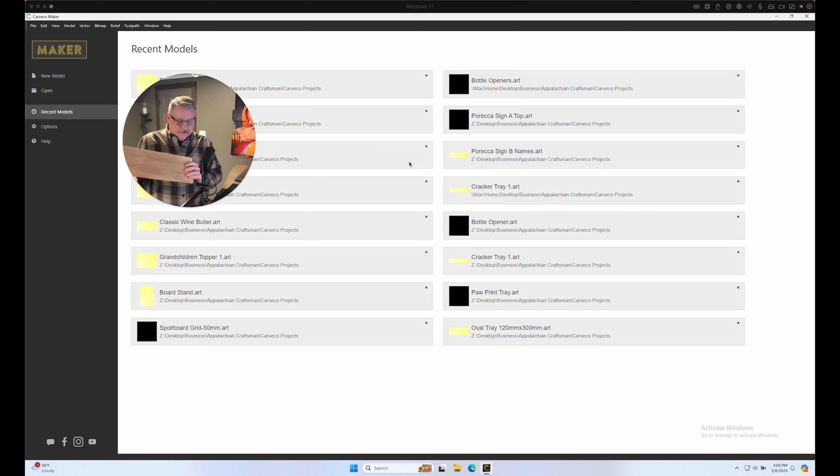Okay guys, so let's get started here. I have a scrap piece of beech wood left from a project from a long time ago, and I'm going to give this a quick measure. When I'm working with smaller projects like this and projects I originate, I typically tend to work in metric, in millimeters. It's just way easier than messing with decimal points and odd fractions and that kind of thing.

If you're not used to that, I know it can be a little bit of a challenge, but something I recommend is this Fastcap rule here.

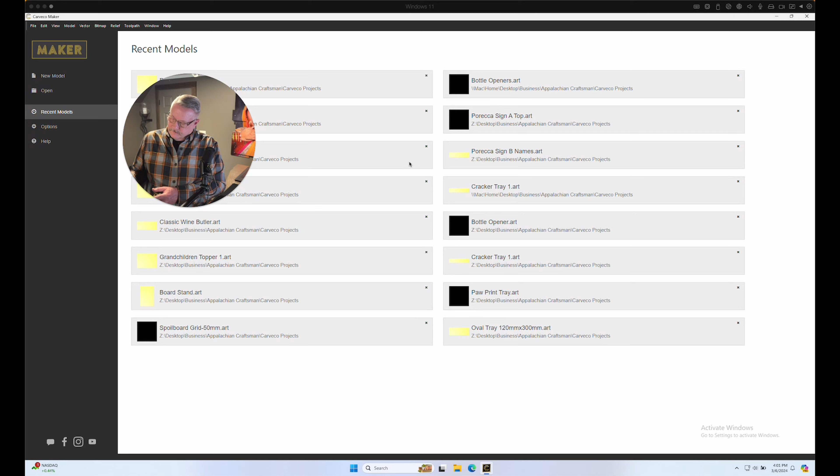It has both metric and imperial on it, and I've found it a great help for transitioning. So I'm going to give this a quick measure, and lengthwise, I am at, let's see, 550. I'm going to call this 550 millimeters, and widthwise, I'm going to call that 150. So 150 by 550.

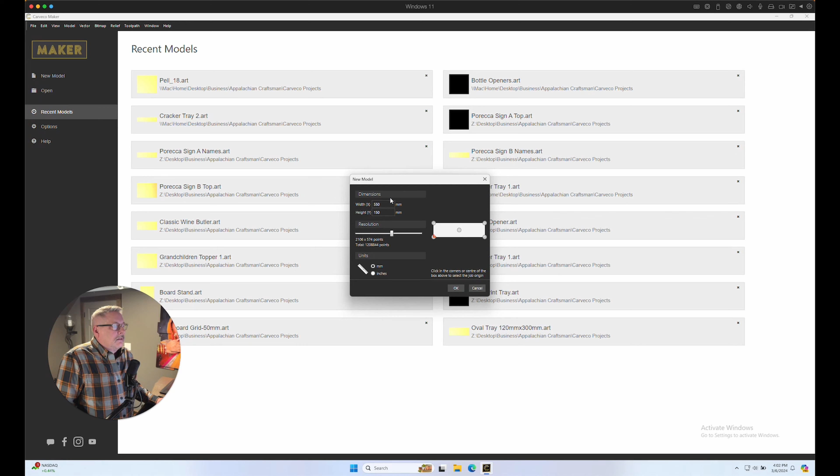So now we know the piece of wood that we're going to use, what the size is. In Carveco Maker here, we're just going to start out with new model, and I'm going to enter in there 550 millimeters by 150 millimeters. If you want to work with inches, you can certainly feel free to do that. Just hit this little button down here, and you can work alternatively in inches.

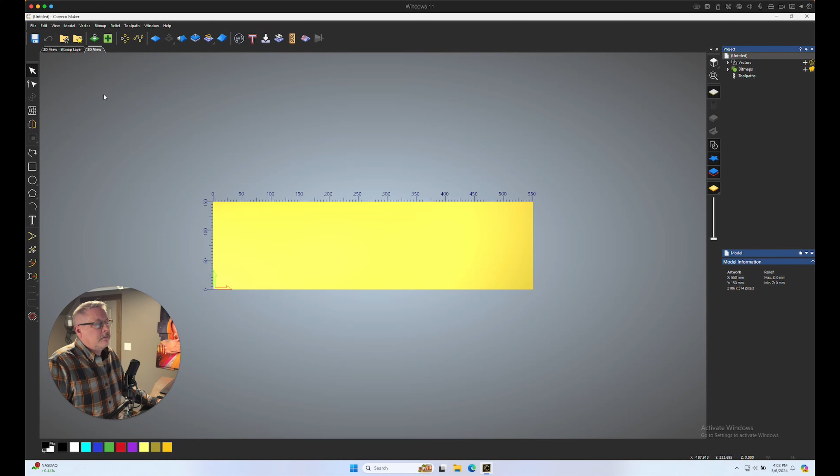Resolution is fine. This is nothing that greatly detailed, so wherever it is at default is fine. For the origin, we're going to use our lower left-hand corner so that when we probe XYZ, this will be all automated on our machine. So with that set, I'm going to hit OK. Carveco Maker is going to set up our workspace so that it is basically the same size as our piece of wood that I'm using here.

Okay, so from here, what we want to do is bring in our vector files. So I'm going to go right up to the top here and click on Vector, Import, and right on my desktop here, I've got an SVG file called Opener. I'm going to open that.

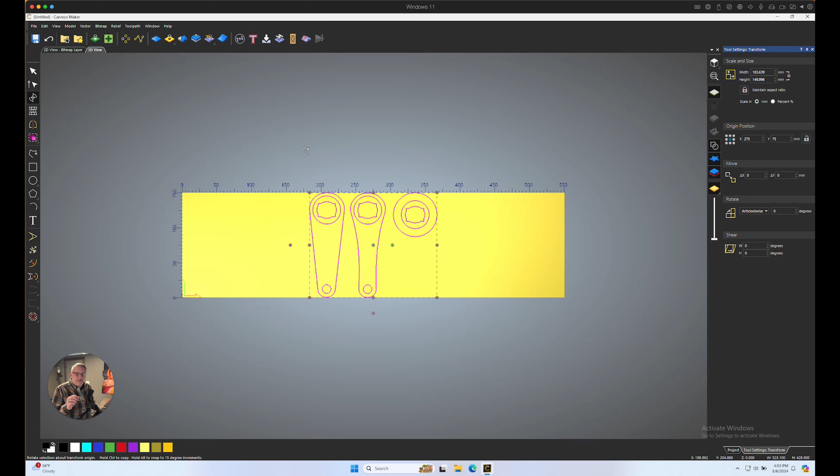Now, SVG files do not necessarily come in to size, okay? But they are scalable. So what we want to do, because in this case, we do have a metal insert that we're going to be putting into them, and the circle that's in this file definitely needs to be the correct size so that these fit. So I'm going to show you a little trick here how to make sure that these are indeed the correct size and will fit the insert.

So if I measure my insert here, I am at 39.63, okay? So that's about 40 millimeters. So what I'm going to do, I'd like to have just a little bit of room. So I'm going to want the space for this to be 41 millimeters.

So I'm going to come over here and I'm going to grab my circle tool and start to draw a small circle out. Now over here on the right of Carveco Maker, we will see automatically come up the tool regarding the circle. So what we want to do is set our diameter to be 41 millimeters, and we'll click Create. That gives us a circle on our workspace that we know is 41 millimeters, which is the exact size that I want this insert to be, the exact diameter.

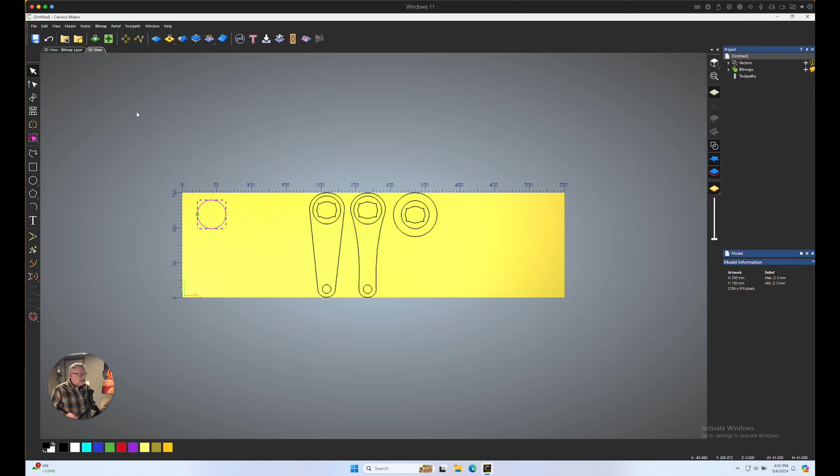Now I'm going to click and drag on our vector files that we brought in, and start sliding those over. In this particular case, it looks like we are really close, but that doesn't always happen with SVG files, so you will want to check this. You can see the purple lines here, this circle, over top of that black line, and boy, it is very close, but that doesn't mean it's exact.

I'm going to click off of that. We're so close, I don't think we need to worry about resizing the whole drawing. But you certainly can—just hit Shift, and then you can click and drag a corner. Let me show you here.

If I select all of these, I'm going to come over here—third one down is our transform. When you click on your transform button, you'll see the box show up. And if I hold Shift, I can resize these and move them around. Okay, so I'm going to undo that.

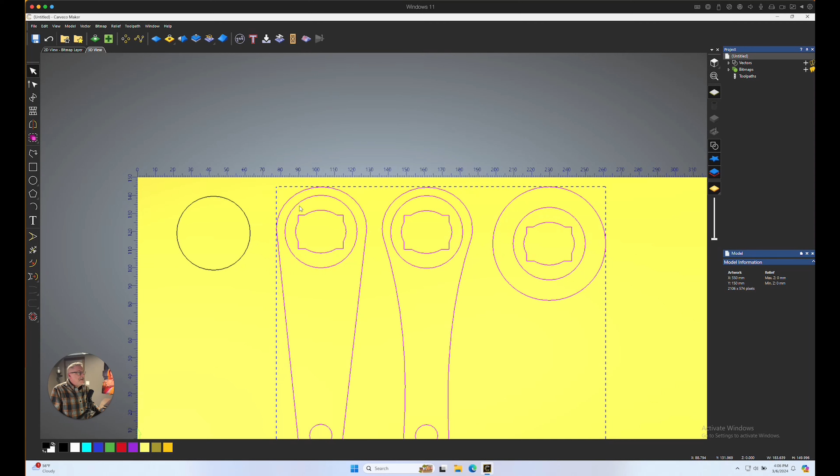If we do not hold Shift, which is actually what I want to do—I get confused, so I'm sorry, because I work on Mac and in Illustrator a lot, and certain things you have to hold Shift for, certain things you don't. But in this case, we do not want to hold Shift. We just want to click our transform, grab a corner, and we can scale this up or down and move it around.

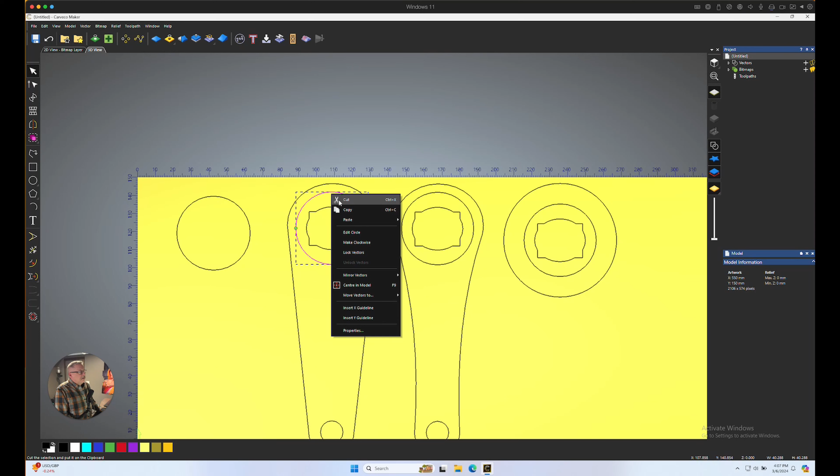Having said all that, these circles are close enough that if I need to make a minor adjustment, it's certainly not going to affect the drawing. So I'm going to select this circle, and if I right click, I can choose Edit Circle.

Now when I do that, that brings up our circle tool again over here on the right side. We can see in my particular case right now it's at 40.288. Well, I certainly want that to be 41, so I'm just going to override that to 41, and create.

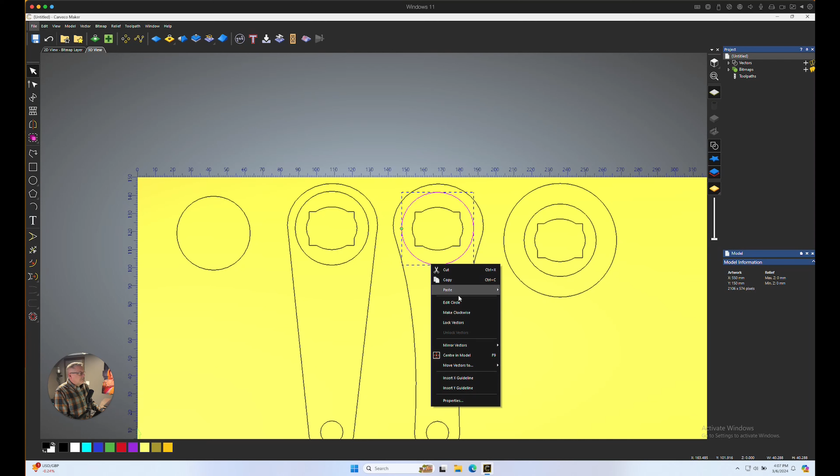I'm going to do the same for these other ones. Click the next one, right click, edit circle, make that 41 millimeters. Lastly, this round design here—click that circle, right click, edit circle, and make that 41 millimeters as well. All right, so there we go.

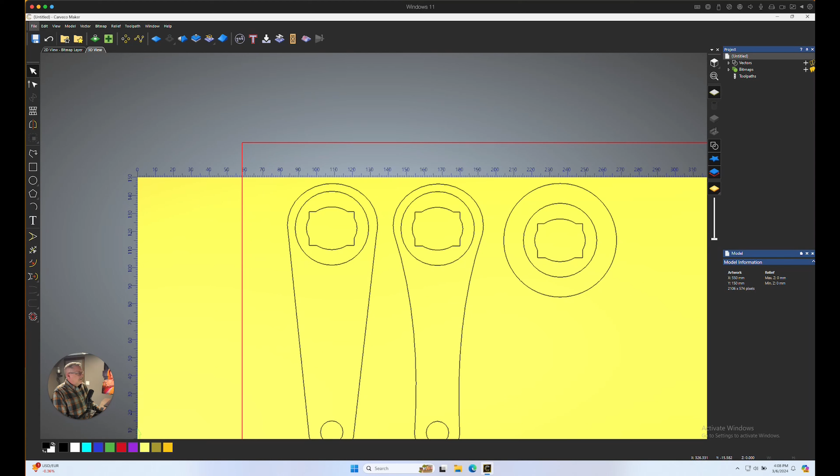Now I can get rid of this circle, and that takes us to just having these three vectors ready to go. So what we can do now is position these so that everything fits on our scrap piece of wood, and we can batch these out and get as many out of this piece of wood as we can.

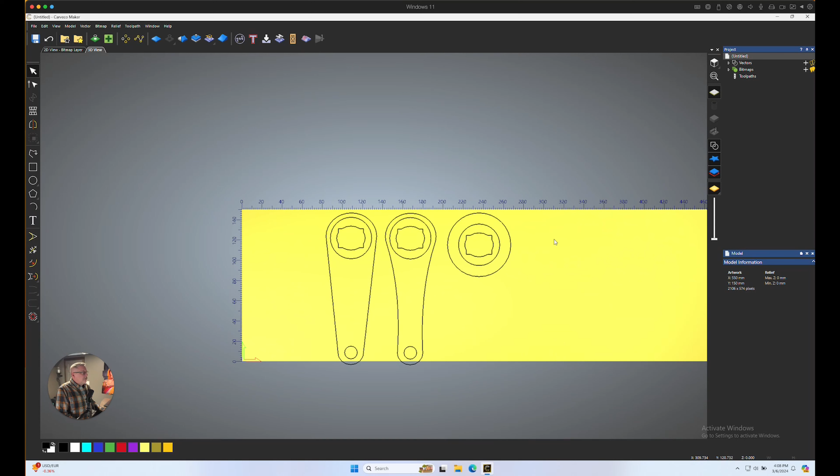If you ever need to recenter your workspace, you can just come over here to the right side, and the second button down will allow you to recenter that. And then I'm going to zoom in just a little bit here again.

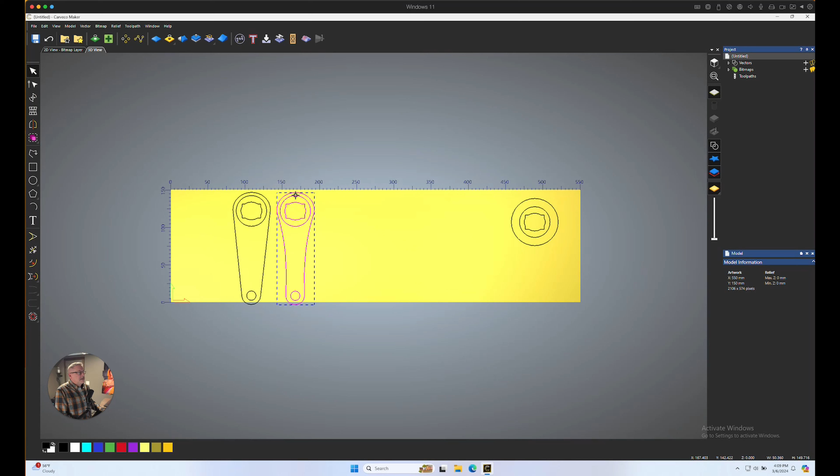So what I'm going to do is grab this first circular one and just move it out of my way. Then I'm going to grab the second one, click and drag, and move it out of my way as well. And then finally, I'm going to take this first one here and once again click the transform button so that I can rotate this.

Now we know it's the right size—all three of these are the right size, so we don't have to mess with the size any. But what we want to do is come over here to the right side, and there is an area called rotate, and you can choose counterclockwise, or Carveco Maker calls it anti-clockwise. In this case, we're just going to choose clockwise and 90 degrees.

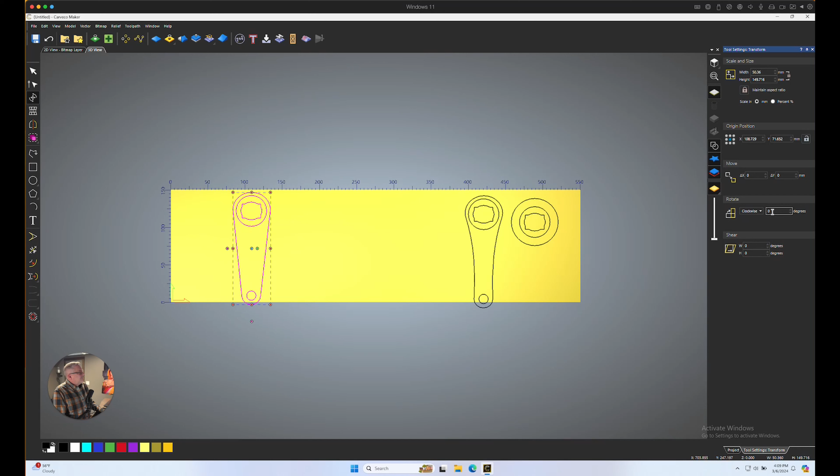And that will turn that right on its side. Then I can position that where I want it. In this case, I'm going to keep that highlighted.

I am going to copy that, which you can use Control C if you like. And then I'm going to come back up to Edit and paste that, which would be Control V if you like, and move that down here. Okay, so I've got those two ready to go.

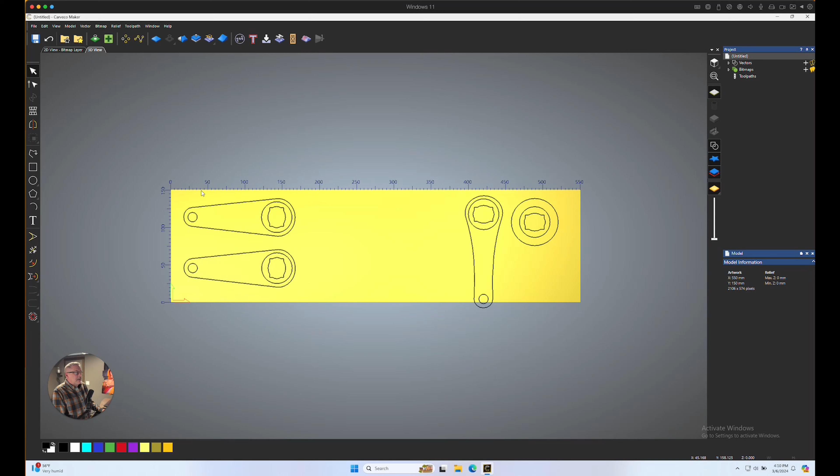Now we're going to do the same thing to this second one. I'm going to click and drag, highlight that one, and then come again to my transform tool, third button down on the left. We are going to turn that clockwise 90 degrees. Apply. I'll move that over.

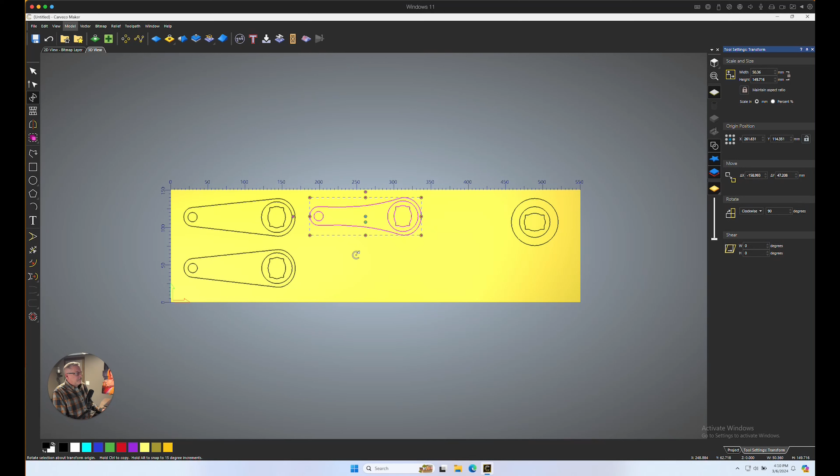Control C, Command C if you're on a Mac, copies. Command V or Control V pastes, and there's our second one. So now we've got 4 out of here.

Let's go ahead and do a couple of these round ones as well. Again, we're going to copy that and paste it. There we go, so let's move that over. Click and drag, grab this one, and we will move it over. And I'll tell you what, I think we got room for one more here.

You want to make sure that you're giving yourself enough room between these, because remember, we're going to be using a 1/4 inch end mill to cut these out. So we're going to want to have a little room. There's no sense bunching things up too much. Now I could squeeze some more out of this board if I really wanted to by rotating these and turning them around and positioning differently, but this is fine for demonstration purposes.

And I'm already going to get 1, 2, 3, 4, 5, 6, and I'm going to go ahead and copy this one. And again, paste. And so we're getting plenty out of this little piece of scrap beech that I've got here. So there's 7 of them out of there.

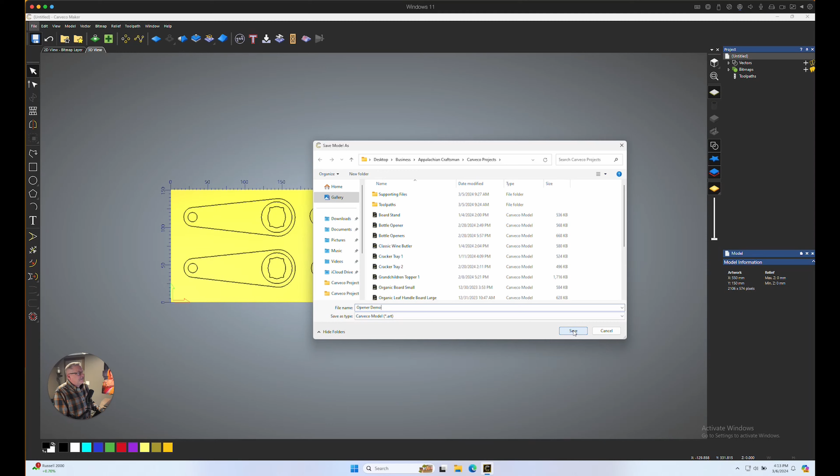All right, so now we've got our pieces positioned, and now I've been working in the 3D view just kind of by default, but you can be working in the 2D view for this as well. It really doesn't matter. It's just a matter of when you actually get ready to view your 3D view that you want to make sure that you're in your 3D view section here when you do your simulation. So I tend to kind of just work in 3D view, but it certainly doesn't matter.

All right, so we've got all our pieces, so now let's start thinking about our order of operation. So I think the last thing that I would like to do is to cut these out. Now I'm going to put these on the CNC with the CA glue and blue tape method. So these are all going to be held down really good. I'm not going to need to put bridges in or anything like that. So that'll be my last operation, is cutting these out.

And I think what I'm going to do is these small holes here on these 4 that I'm using for basically a hanger, or you could tie a piece of leather to it, or rope or whatever you have, some type of a string, whatever you want to do there. But I think what I'm going to do, since those are so small, is I'm just going to pocket those out. If I cut those, you could end up with that little piece floating around that could jump out and break a bit or something. It's just not worth it. And it literally only takes maybe a half a second. So I'm just going to pocket those out.

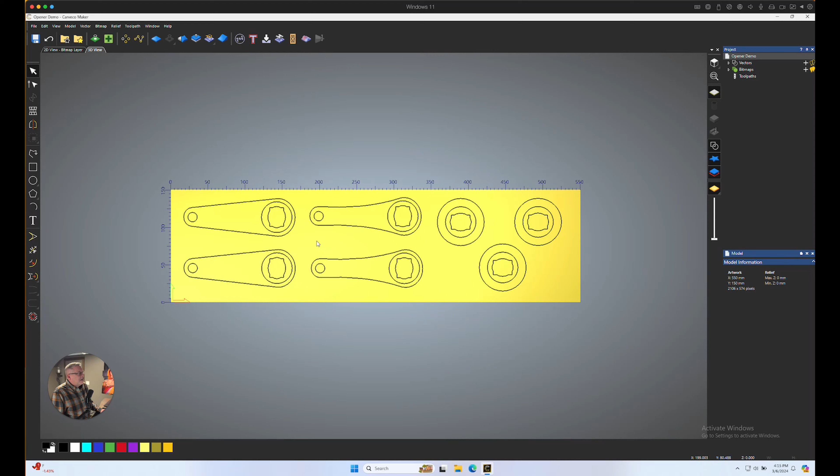So I think what we'll do first here is let's get our inner circle set here. So I'm going to select all of our inner circles. I'm just going to click on that first one.

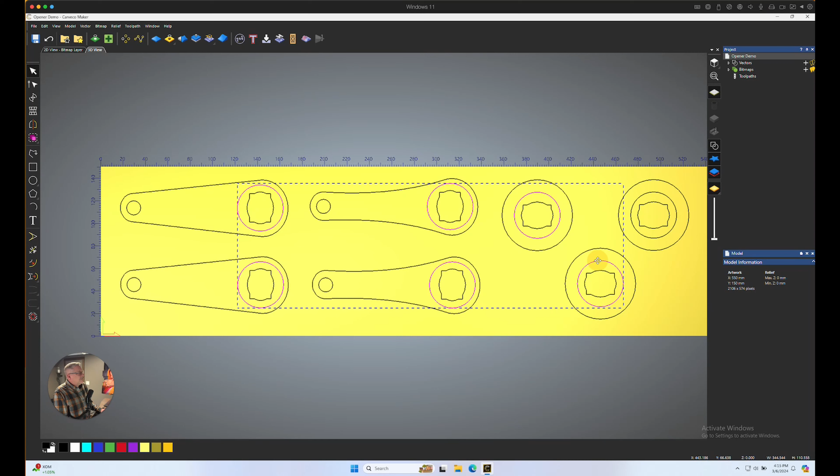I'll hold down Shift, select the second one, third, fourth, and then grab these three over here. Now we're going to start working on our toolpath.

I'm going to go to Toolpath, come down to Area Clearance, and make a little pocket here. These are just a shave under 1.75 millimeters thick, so to fit nice, I think I'll make that hole 2 millimeters. Our start depth is going to be 0, the surface, and our finish depth in this case is going to be 2 millimeters. You see what I mean by working with these smaller projects where millimeters just kind of comes in handy versus trying to work in Imperial—it just makes life a little easier.

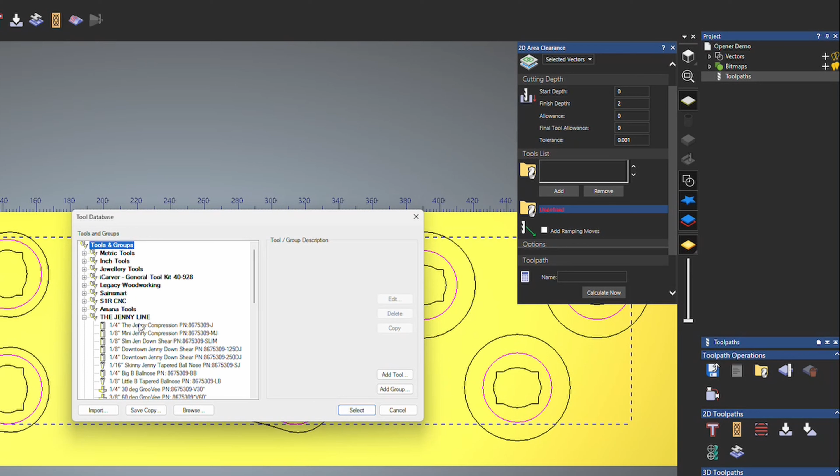Now what I'm going to do is add a tool here. In this case I'm going to use my quarter inch Jenny compression bit—nice quarter inch compression bit. Take that out, and all of our defaults as far as speed and feed here are just fine. That tool data file is downloadable from Cadence Manufacturing if you've got the Jenny bits, so you'll want to do that. All of our default feeds and speeds in here are fine.

Now the one thing I am going to change here is instead of a raster cutout, we're going to do an offset cutout. That way our bit goes in a circle to take that out, and since we're making a circle, that'll work out very nicely. This is so shallow that we really don't need to worry about any ramping moves, at least with the machine that I have, the Onefinity Foreman Pro. We're only going to be taking out a very shallow little pocket.

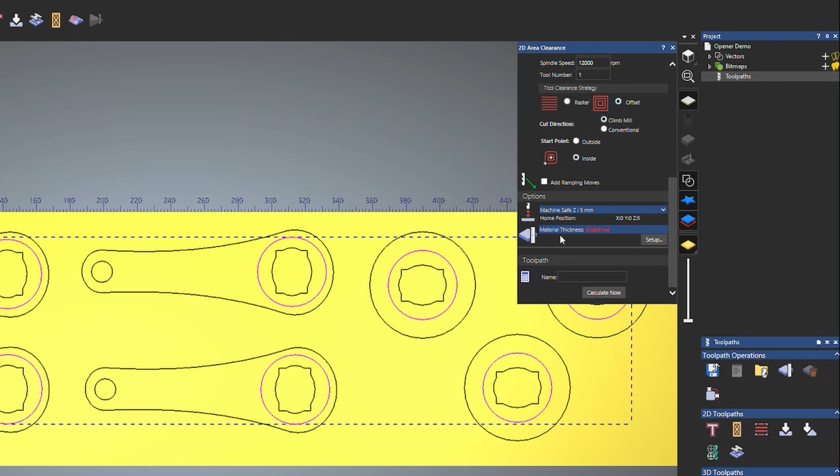And then lastly, the one thing we have left to do is set up our material thickness. So I'm going to hit Setup, and using my calipers here, I'm going to check my material thickness, and that is 21.2—so I'm just going to call that 22 millimeters thick.

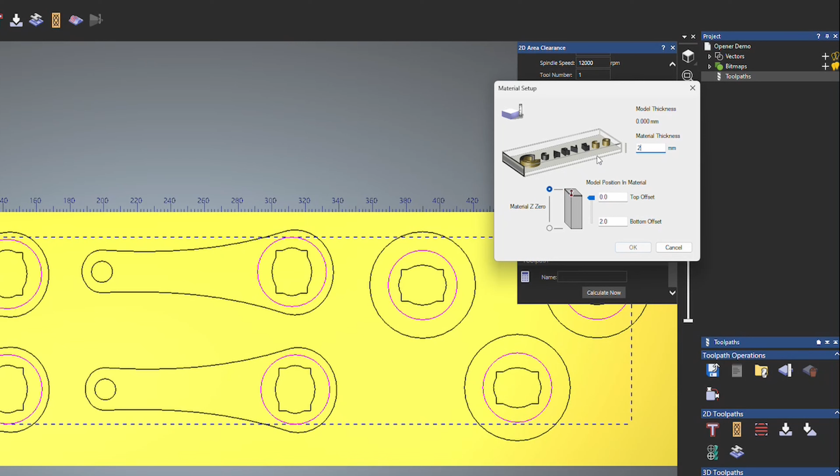There we go, and so now all of our toolpath is ready. All we have to do is name this—I'm going to call this Insert Pocket—and we'll hit Calculate. All right, and there you go. You can see that the bit is going to come in from the lower left side and make some concentric circles here, and we are going to cut that shallow 2mm pocket. That's going to be the first thing that happens here.

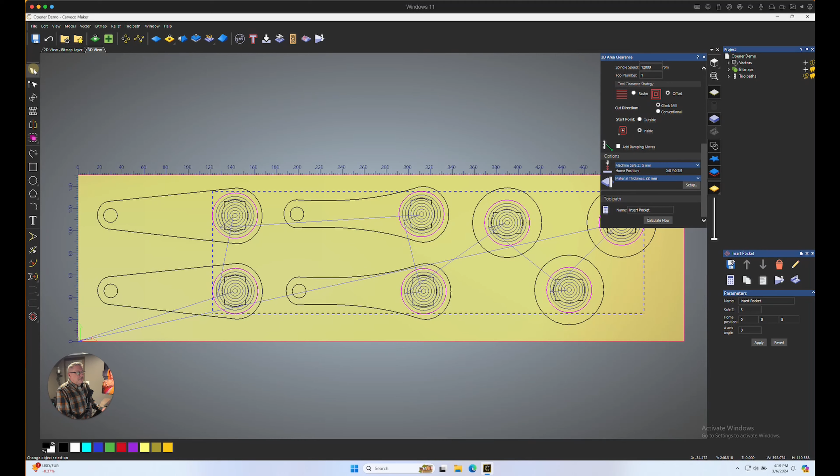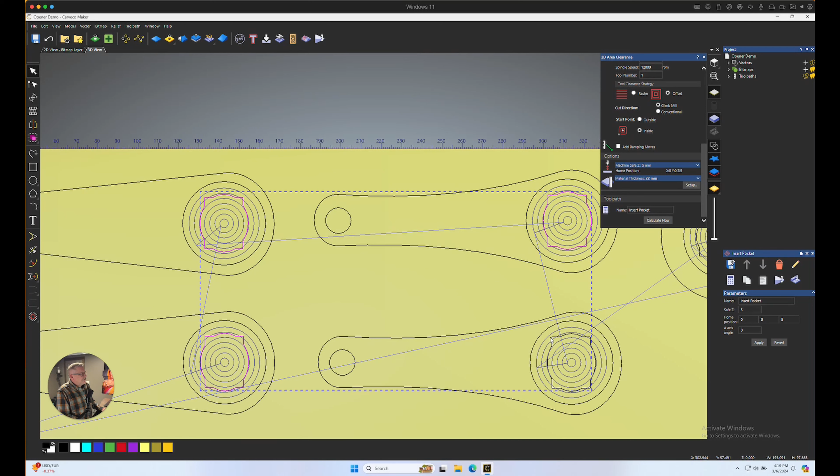So now what we're going to do is zoom in a little bit on these to make things a little easier to see and to grab. I'm going to click off of that, and now select these funky kind of shapes here—select all of those, holding Shift and clicking. I'll zoom out and then zoom back in over here, and again hold Shift and click that one, and that one, and that one. Okay, so now I've got all 7 of those pockets selected.

So now we've already got our pocket tool area here still up, and nothing is going to change—we are just going to change only the depth that we're going. We selected these other insert pockets, and that's just going to be a deeper recessed area that will allow the cap to go into when you have your bottle opener. And we're going to use the same bit—beauty of this project, super simple, one bit, no bit changes.

So what we're going to do is, right at the top here, cutting depth—now remember, if the first thing we do is cut out that shallow pocket, that pocket is 2mm under the surface. So our start depth will be 2mm, and I think if we allow 10mm for that area, that's plenty for a cap to fit in there easily. 10 plus 2 is 12, so we're going to make our finish depth 12mm, and everything else defaults, our same bit is in there.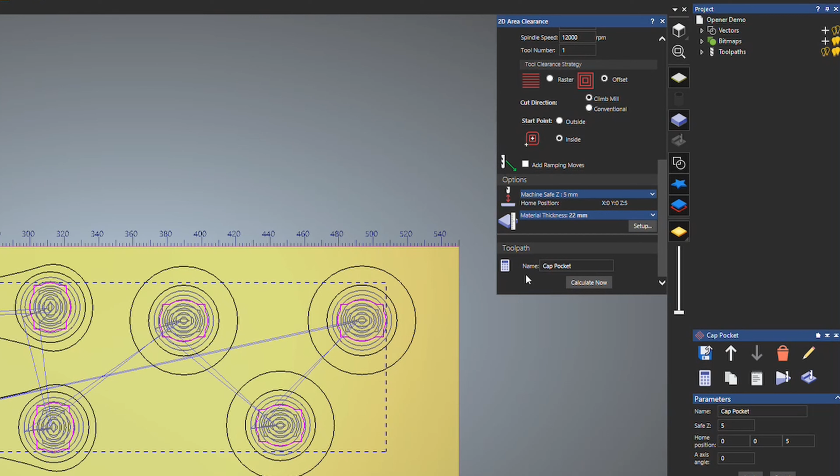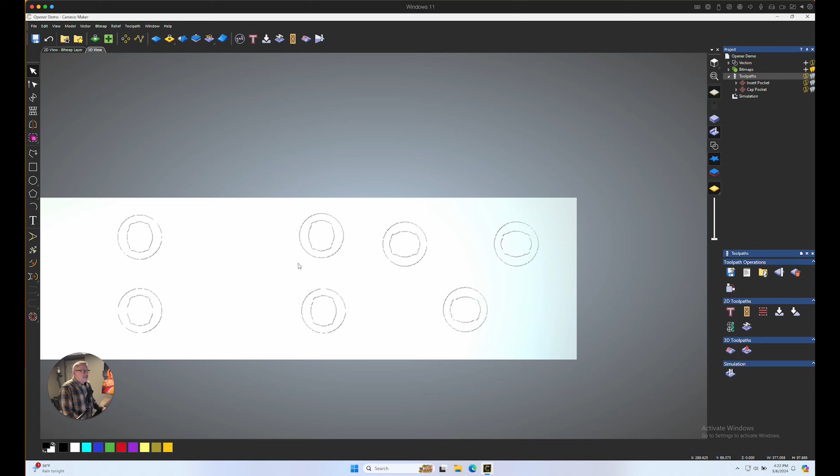And again, there is our toolpath for that. Now I'm going to go ahead and close this. And if I go into our toolpath button over here on the right side, you can see I've got insert pocket and cap pocket. So before I go any further, let me go ahead and simulate that, and so you can see what that looks like.

So there we go. If I zoom in, you can see we've got our outer circle 2mm deep that'll hold our metal insert, and then our interior pocket or cap pocket is going to start at 2mm and then go to a total depth of 12mm.

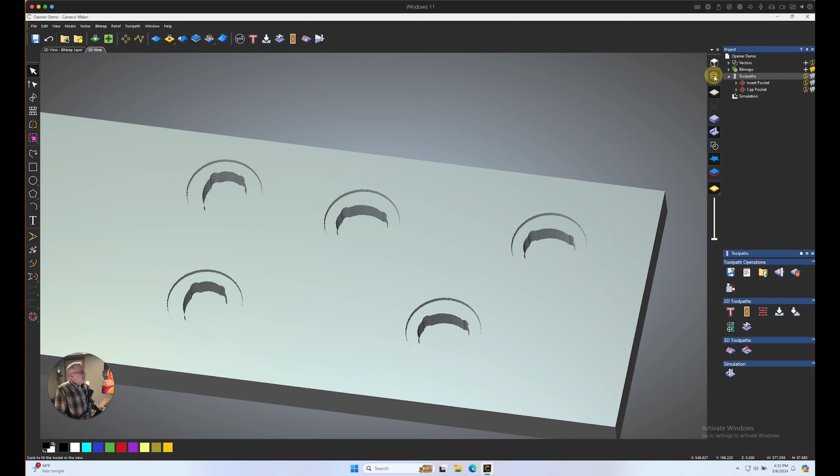And then once again, I'm going to hit the button here to center our project, and I can come back in, zoom in. Now I'm going to go ahead and delete this simulation so it's not in the way for us.

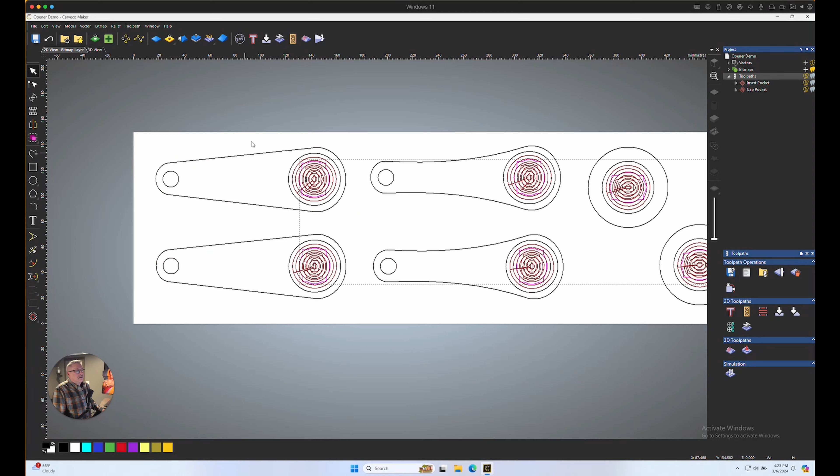Let's see, I'm going to come back into 2D view where we can still see everything here. Now what we'll do is we will take care of these small holes here. We're going to pocket those out.

So those should be easy enough to, sorry, I don't mean to jump that around on you, but it scrolls really fast here. So I'm going to select the first vector hole here, hold down Shift, second one, this one, and this one. The round ones don't have that.

And so now we're going to pocket that out. So I'm going to come back over here to our area clearance tool, and our start depth will be 0. That is the surface. Our finish depth, what did we say that was?

22mm deep. Our tool, again, I'm using the same bit, my 1/4" Jenny compression bit. Select that. Everything else stays the same.

And we are going to choose offset again, round hole. We want to do offset so that that bit goes in a nice concentric circle there. And again, we really don't need ramping moves for something this small, very easy.

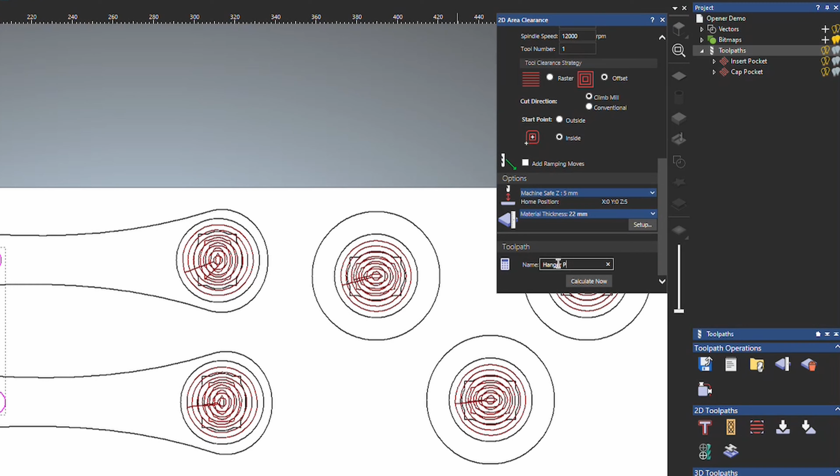And so now we will name that hanger pocket, and I will calculate that. You can see that bit's going to come right in, go around and take that out. So that takes care of that.

So we are almost there, kids. All right, so now what we have to do is just cut our actual pieces out. We've got all the insides cut the way we want them. Now we're just going to do our profile cut on the outside.

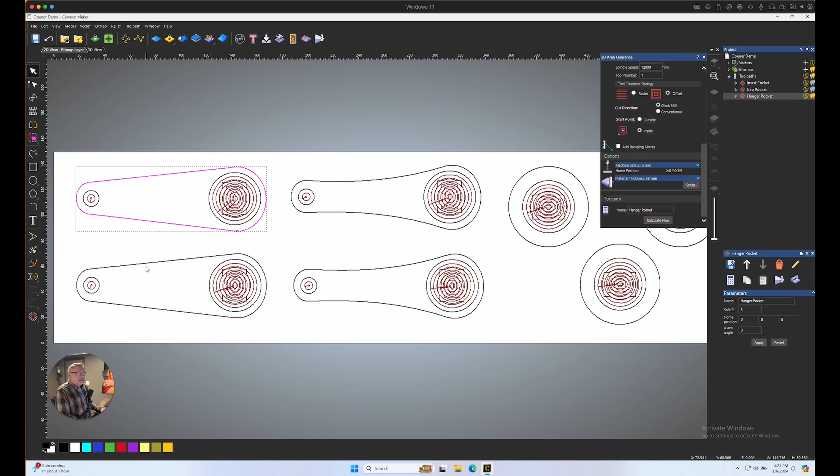So I'm going to select the first one here, hold down shift, second one, third, fourth, and then we'll get the outer pieces of these over here. Get that out of my way. And now that we have all of our exterior lines collected and selected, you can see they're purple there.

What we are going to do is come to Tool Paths, and we are going to select Create Profile Toolpath down here under 2D Toolpaths. We want these to cut out, so we want our bit to ride on the outside of these selected vectors. Our start depth will be 0. Our finish depth will be 22, so we go all the way through.

Again, same bit, 1/4 inch Jenny compression, what I'm using. You can use any bit that you like. My suggestion would be something, though, that is a down cut, but a compression bit, if you have it, is great.

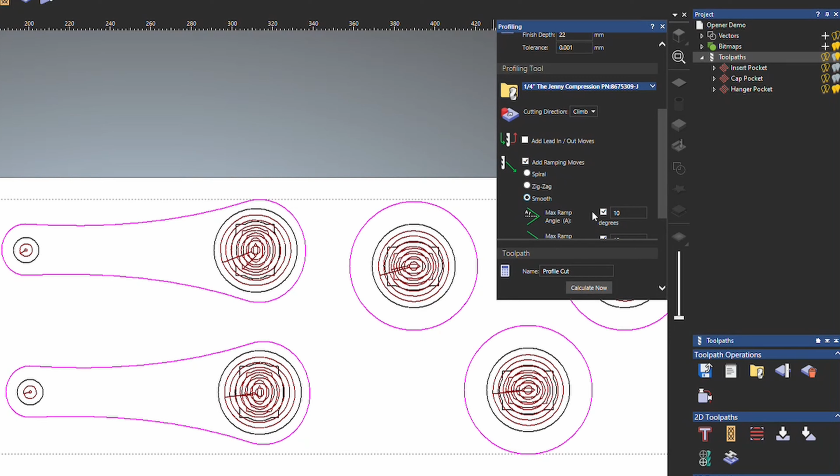Now for this one, it might not be bad to add a ramping in some of these longer ones here. So I'm just going to do a smooth ramp. Defaults are fine, and I will hit calculate. And you can see that outer ring appear around our vectors.

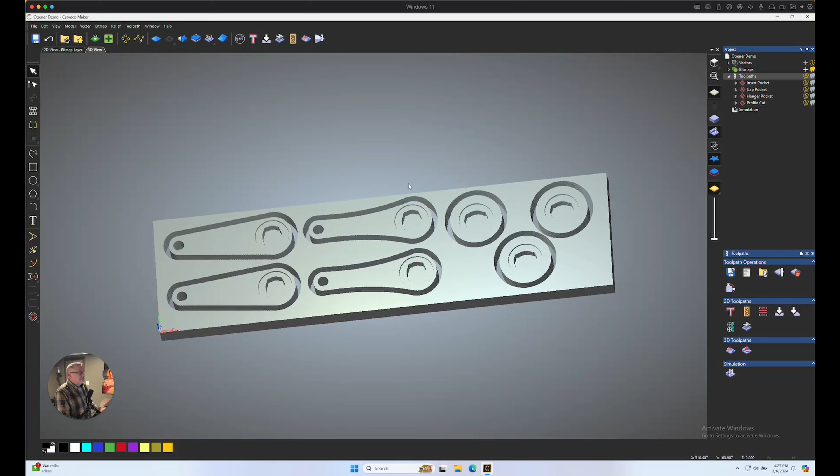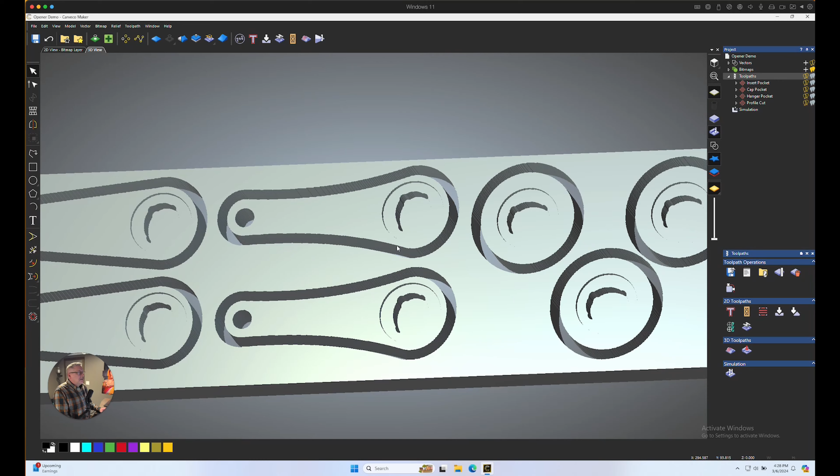And we are set. So if I come to Toolpaths now, and I go ahead and simulate this, there you go. You can see we're all the way through, and we've got all of our pieces made. We've got our pocket for our insert, a little bit of an extra pocket here to allow room for that bottle opener to get around the cap, our holes here for hanging, and then lastly our profile cut. And remember, I didn't do any bridges or anything in this because I'm going to be using the tape and CA glue method to hold these down, so it's going to hold them in there just fine.

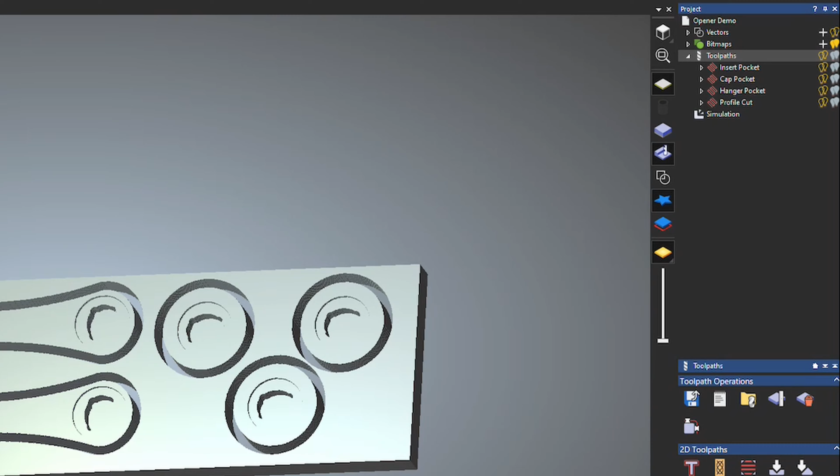So there we go, we are set. Again, hit save to save that whole file and make sure that we have that. And so now all we need to do is export our toolpaths. So what we're going to do now, you can see over here on the right hand side, I've got everything in order. I've got our insert pocket, then our cap pocket, our hanger pocket, which is the little hole on these four, and then finally our profile cut to cut them all out. That, I think, is probably the best order of operation for these.

And so now we're just going to come down to toolpath operations, and we're going to hit that save toolpaths button. The easiest thing to do is just come down here and let's move them all off to the other side, and then we're going to bring those in. Well, actually, since we use the same bit on these, I take that back. Since we use the same bit, as long as we have these in order, we can bring them all in, because we're not changing the bit. So we're just going to do one toolpath after another, after another, after another, and it will all be automated.

So I'm just going to double check and make sure I've got everything in order again. Insert pocket is our first one, cap pocket's the second one, the hanger pocket is the third one, and then finally the profile cut. So sounds good.

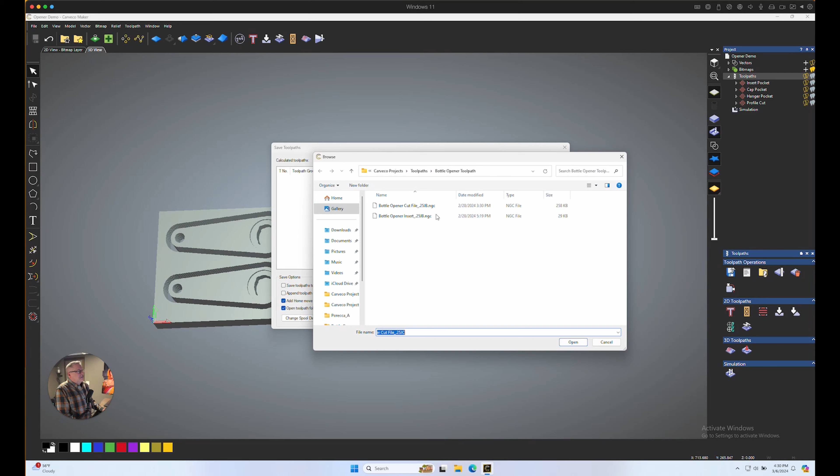All right, so I am now going to save these, and I am just going to call this opener cut file. I tend to like to use an underscore as opposed to a dash, and I'm going to call that 0.25 JC, Jenny compression bit, so I know what we're using. And let's see, I've already got an area for that here, so I'm just going to save that.

And there we go, so we are set. I can close that. So all of our toolpaths are saved basically as one toolpath, because again, no bit changes. So our order of operation is just going to start with the first, go to the second, go to the third, go to the fourth. And with the Onefinity, with the BuildBotics controller, it's going to do that just pretty much all at the same time.

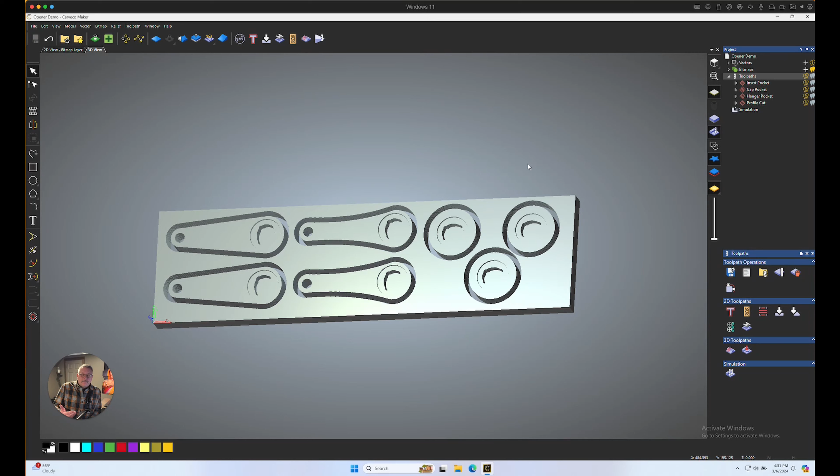So hopefully I didn't jump around too much. This is my first time really doing an instructional type video like this, so it's a little bit of a challenge. But hopefully you were able to follow how to do that easily enough. And from here, I'll pick up again in a moment, and we'll transfer those toolpaths via Wi-Fi to the controller. So stick around, I'll be right back, and we'll do that.

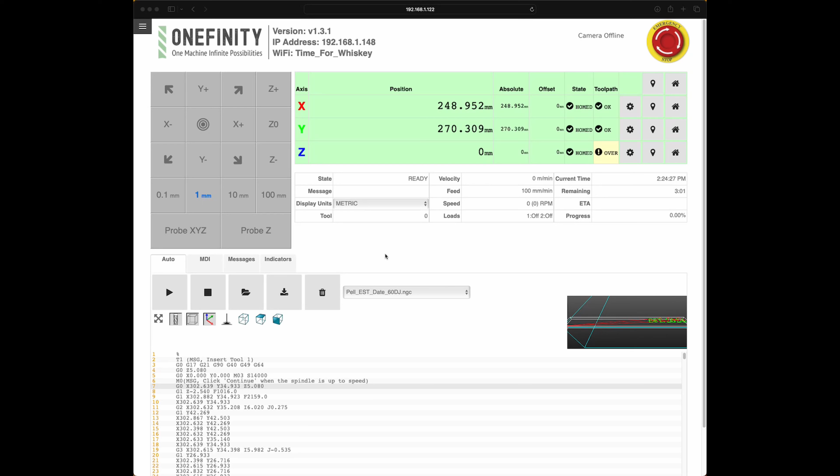Okay guys, so we are back, and what I'm going to do now is I'm going to take that file that we just created, that toolpath file, and we're going to send that via Wi-Fi directly to the Onefinity BuildBotics controller. So if you haven't done that before, what you want to do is you want to make sure that your controller is connected to your Wi-Fi, of course. And then all you need to do is go to your browser, whatever browser you're using, and put this number in that appears on the screen.

And yours may be very different. That's what's called an IP address. So when you look at your Onefinity screen and whatever number you see here, you should just be able to go to your browser and put that in.

And sometimes it takes a minute or two. It's got to go across your network and find it, but it'll end up finding that, and it should bring up your screen. Otherwise, you can also just take that file, put it on a USB stick, and plug it into your controller if that's what you're used to.

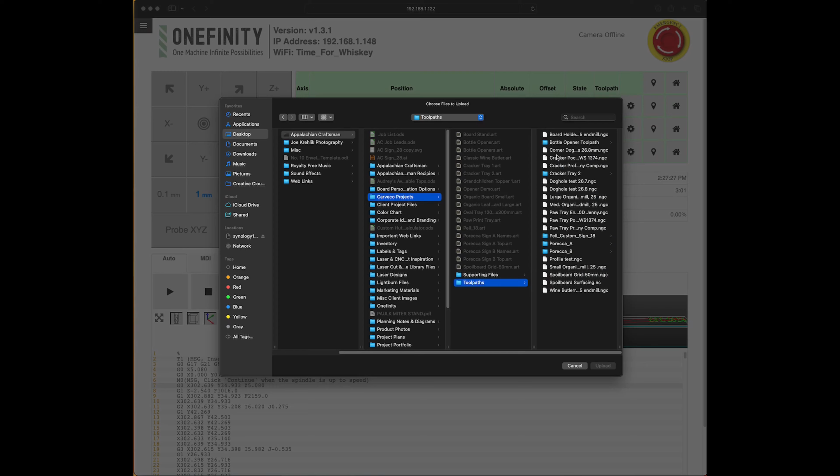So to transfer this down to our machine, I'm up in my office, so we're going to transfer this machine. All we're going to do is come over and select the open file folder, and then browse to where our toolpaths were saved. Then we're just going to simply select that file and upload it, and it'll take a second. It'll go out and connect to the machine, and you'll see it streaming across the network to that, and there you go. It is now to the BuildBotics controller.

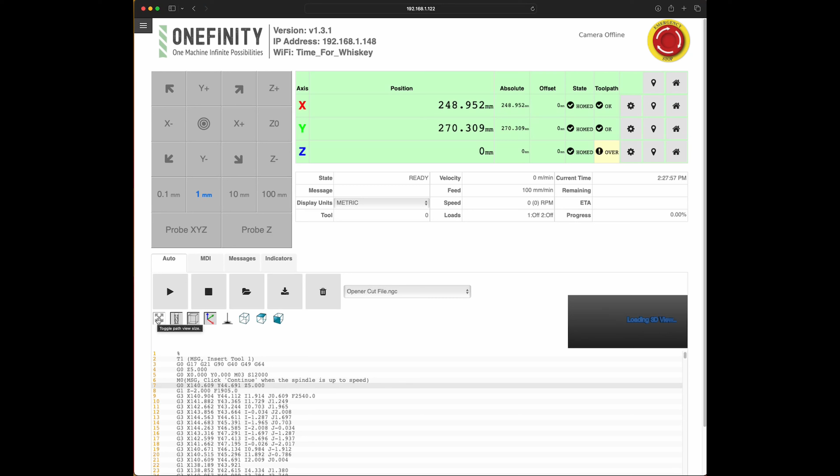The controller is processing that, and it will load up a 3D view over here if you're doing that via Wi-Fi. So it'll take a second to process that and come back across. I'll enlarge that here so we can see it when it does come up. Okay, there we are, it finally appeared.

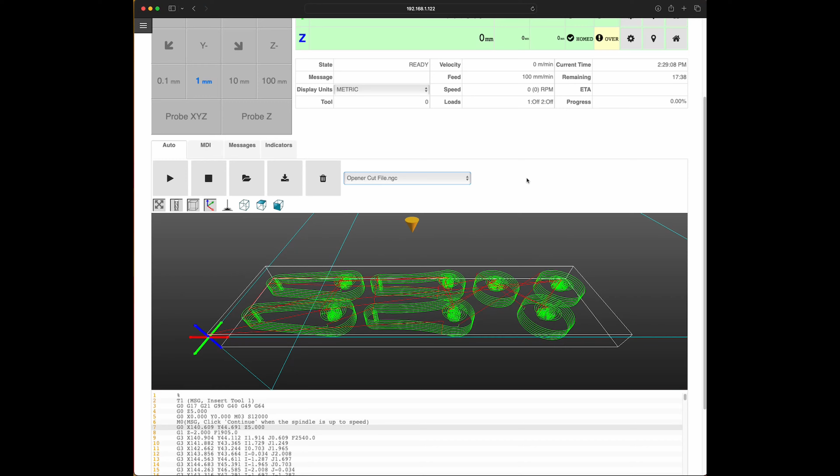So here we can see that file that I just made. We can see our toolpaths in there, and we can see exactly what's going to take place when we pull the trigger and hit play. So I will now stop the recording here for sending the file down, and I'll meet you at the machine, and we'll load this up and cut it. So I'll see you at the machine.

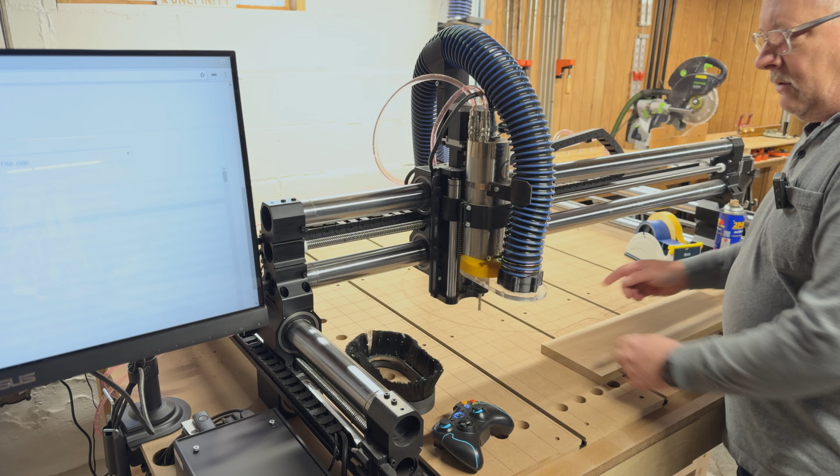All right, so now we've got everything set. I already have my bit in here. I'm using the 1/4 inch downcut in my case. Put my dust boot cover back on there, and as I said, I'm going to use the blue tape and CA glue method here.

So we're going to put this on, and since I'm going to have some loose pieces roaming around, I'm going to go ahead and pretty much cover this whole piece here so none of those pieces come loose and end up getting in the way anywhere. There we go, and then I'm going to go ahead and do the same here. It really helps when you have the grid lines on your spoil board, so you can easily line things up and get things square.

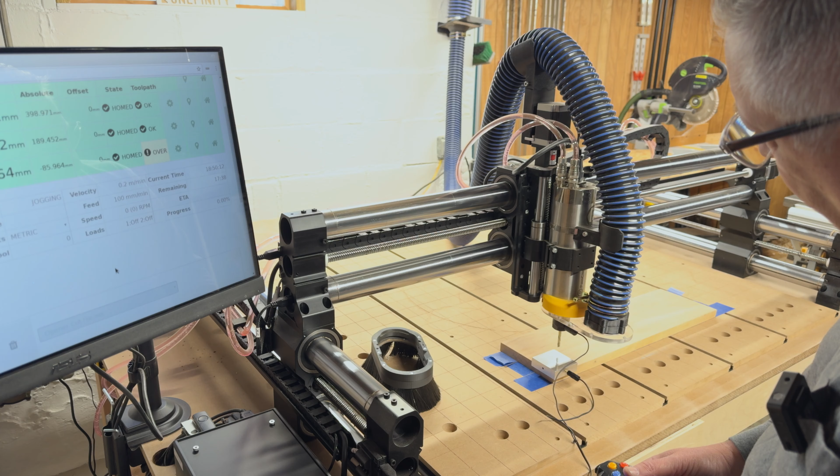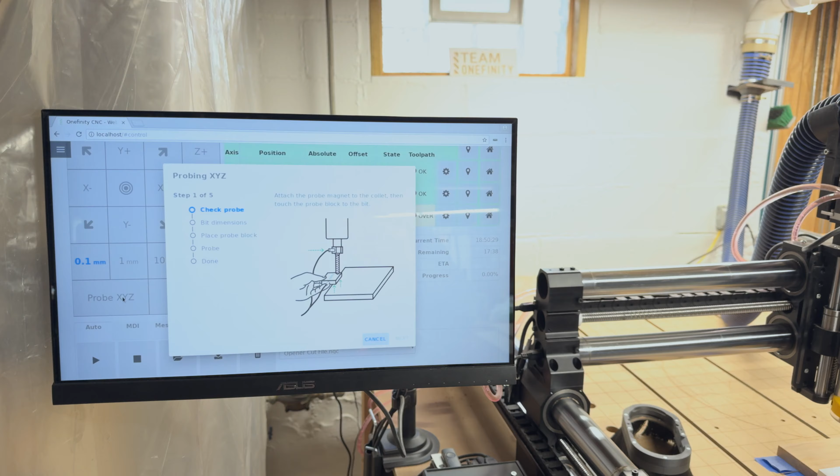On our screen here, we're going to get ready to probe XYZ, but we need to bring this over and position it so we are close to that circle that appears on the probe. There we go, so we're going to probe XYZ, and let me make sure you can see this okay. There we go, I'll come in a little bit.

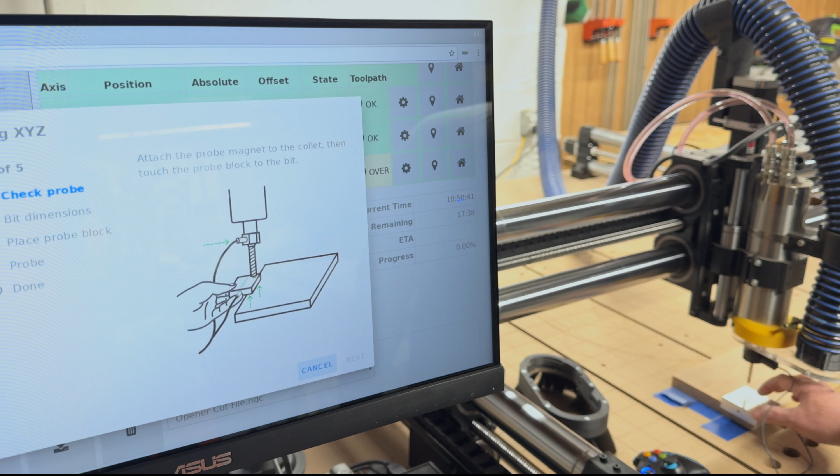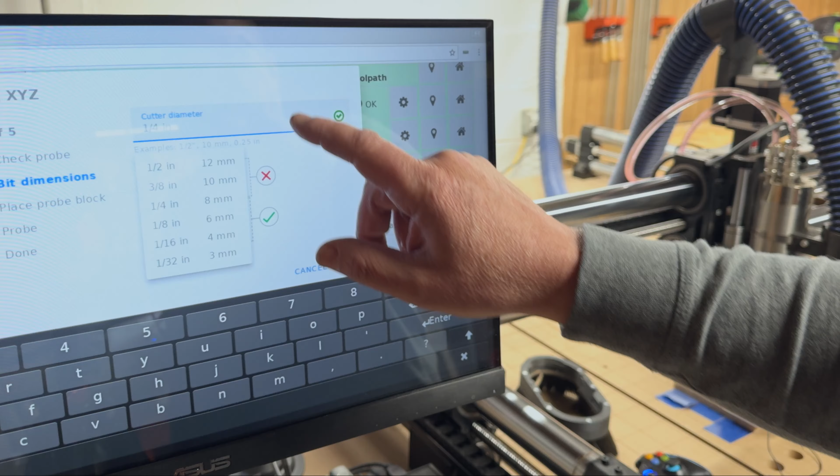The first thing it wants you to do is check the probe, so you just touch the probe to the bit. The very next question it asks is your bit dimensions. It already comes up 1/4 inch, but if it were something different, we could choose that down here. 1/4 inch is fine, we have our block already placed, and we'll go ahead and hit next and let the machine do its thing and probe for X, Y, and Z.

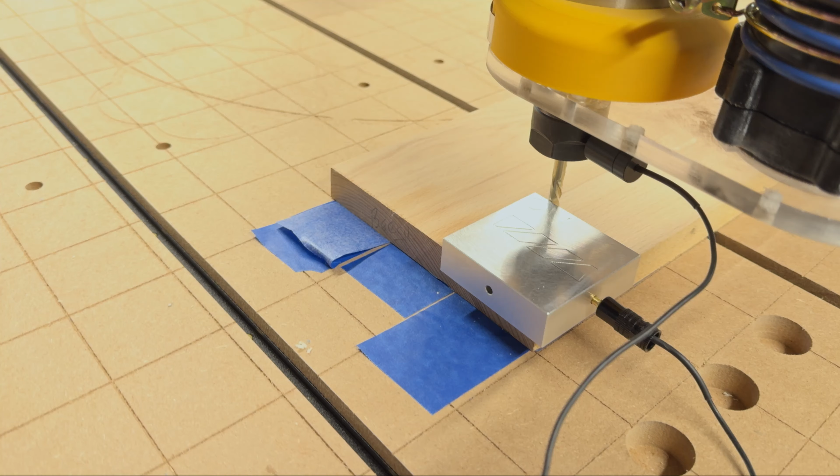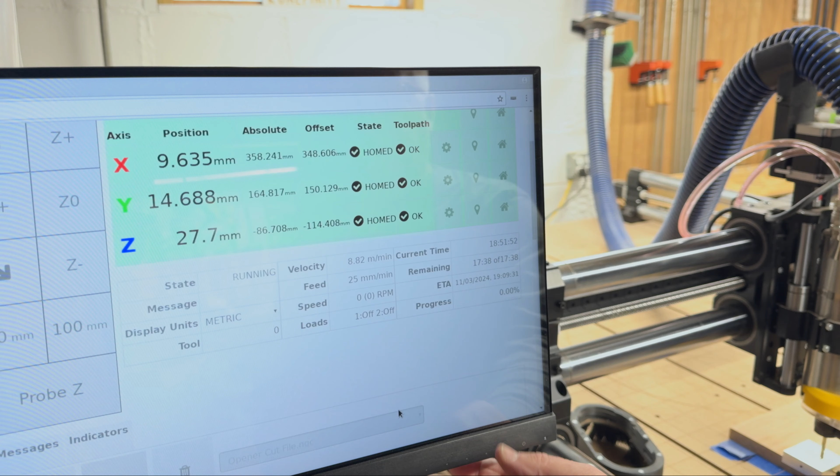With that done, we can just hit done. The spindle moves to our starting point. I want to make sure we disconnect our probe and put it away, and I'm going to put our joystick out of the way.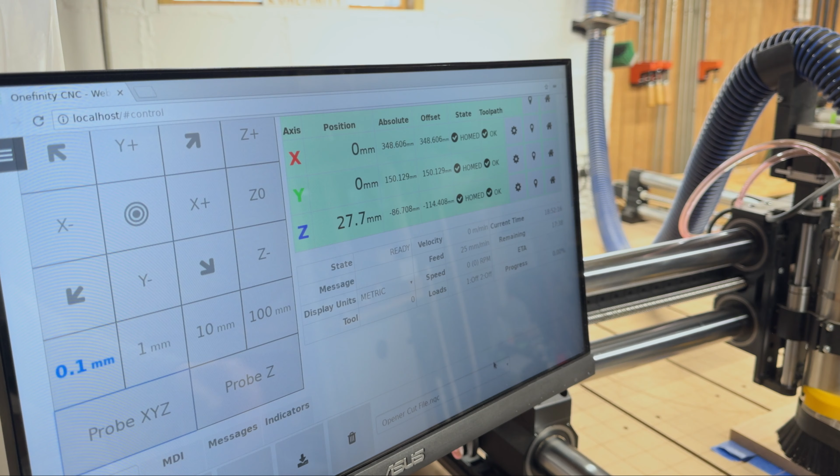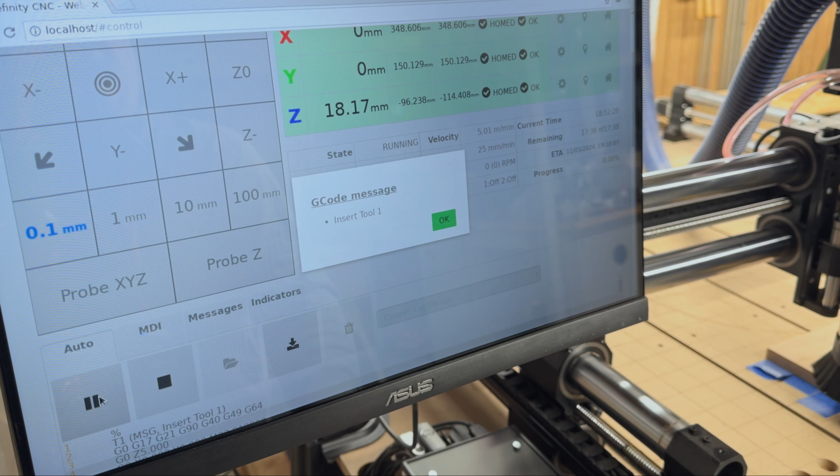In my case, I'm going to put my dust boot back on here, and I already have my VFD for the spindle on. It should automatically start, and from there all I need to do is hit our play button there. And the machine will come up to speed. I want to move this screen out of my way, and from there all I got to do is hit continue.

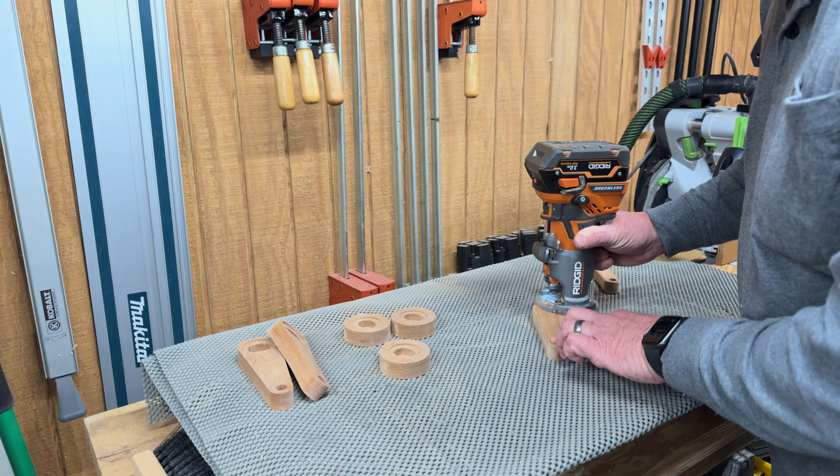So here I'm just going to add a little 1/8 of an inch round over, and I have to say you really should not do this with a handheld router like this unless you're really comfortable and used to using tools like this and have a non-slip pad like that. Makes it a lot better.

This really should be done on a router table, but the one I have is not very great, and it's more of a pain to set up than anything else, so I find myself doing things like this quite often, and I'm pretty used to it and pretty comfortable with it. But if you have a router table, definitely do that little round over on the edges with the router table. And hey, hashtag not sponsored.

Here I'm using some TotalBoat wood honey, and it's very thin. It goes on very easy by hand, and I was trying to be careful not to get too much in the insert pocket area. Just squeeze a little bit on, a few drops, rub it in. Very easy to use, and the finish after it dries is really nice.

And then, like I said, I tried not to get too much in that cap pocket so that I could put a little CA glue on there just to hold it in place nicely, and especially keep it still until you get the screws in there. Just helps out a little bit, and it secures it a little bit more.

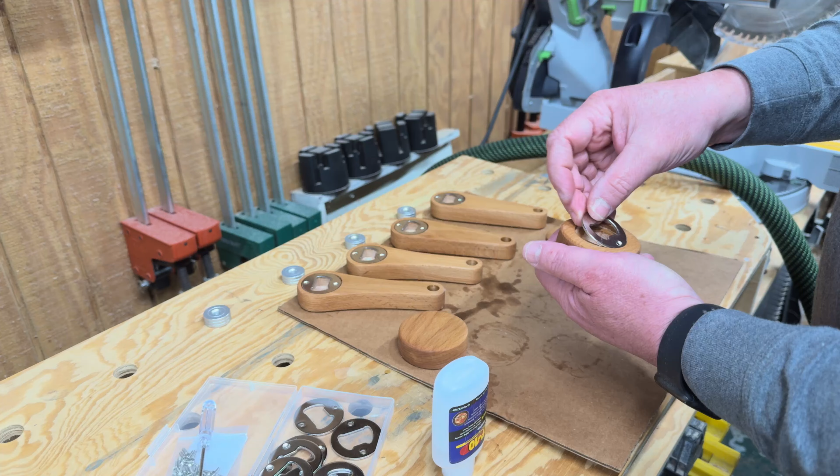And after I got done with getting the caps on, I went back and put a little bit of that wood honey on a towel and got inside there real good, and just wiped it off and let it dry for a little bit. It has a really nice finish, really nice food safe finish. So it's the first time I used it, but I see myself definitely using it more.